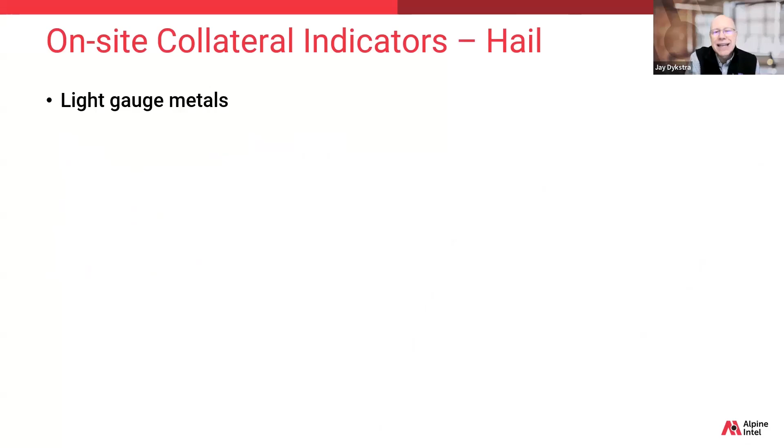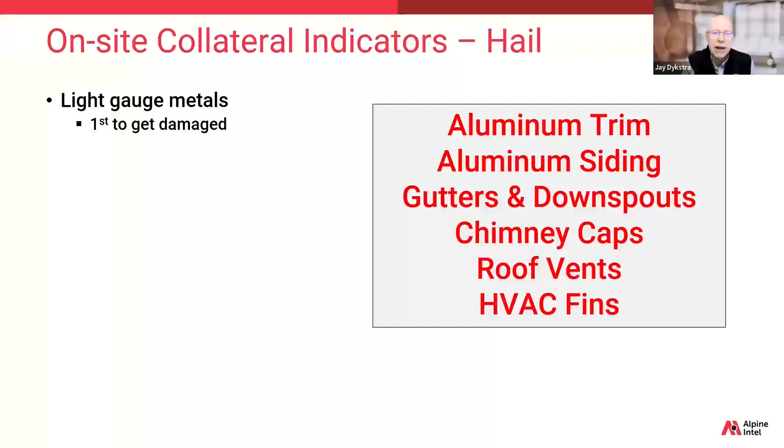So with all hail-related claims, we're going to want to investigate what evidence we have there was actually hailfall at the location of this roof, right? Light gauge metals are a great place to look to see if there was any hail at this property that you're inspecting. Those materials would be first to get damaged, and listed there on the right are just a few of the more common ones, but certainly there are others out there you might find on or around any given commercial property. Here's a couple roof vent caps that are clearly showing hail was present at this location.

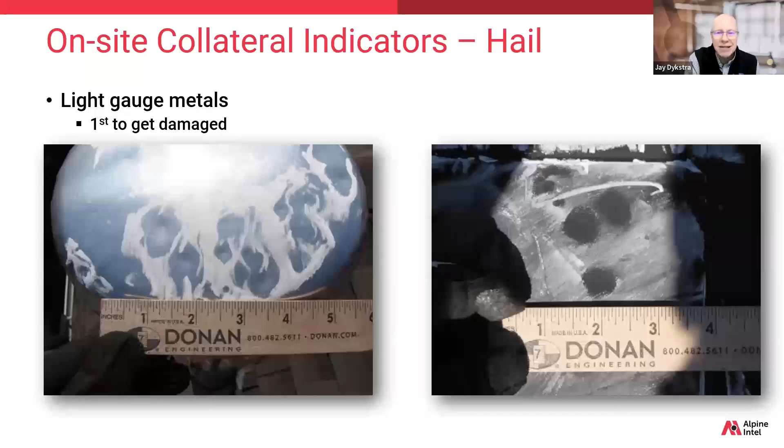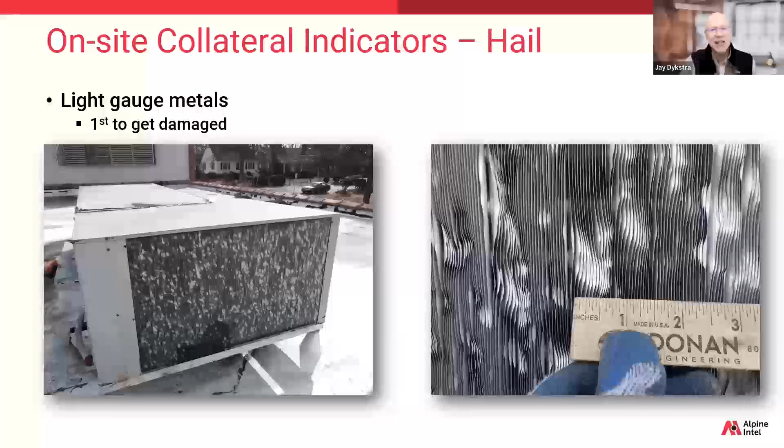Note it's always a good idea to include a ruler in your photo to show scale. Remember, the size of the dent or dents is not the size of the hail in most cases. Here's some more great photos using HVAC condenser fins to tell the story of how much hail, the size of the hail, and the direction of that hail. But be careful, just because you have some or even significant signs of hail to light metals, it still does not guarantee damage to the commercial roof membrane. Don't get ahead of yourself and jump to conclusions.

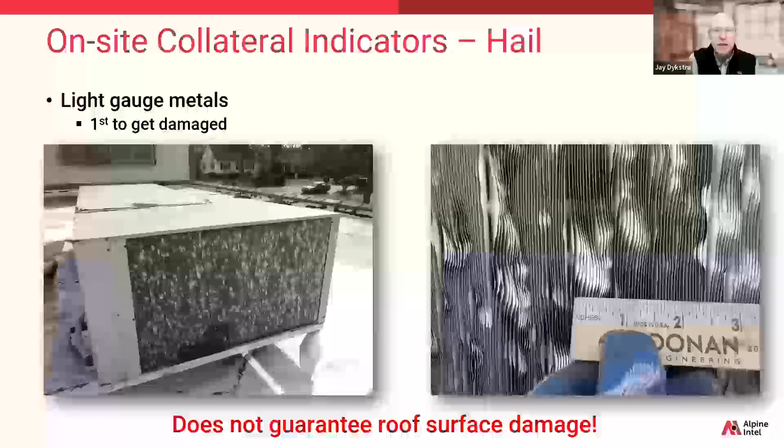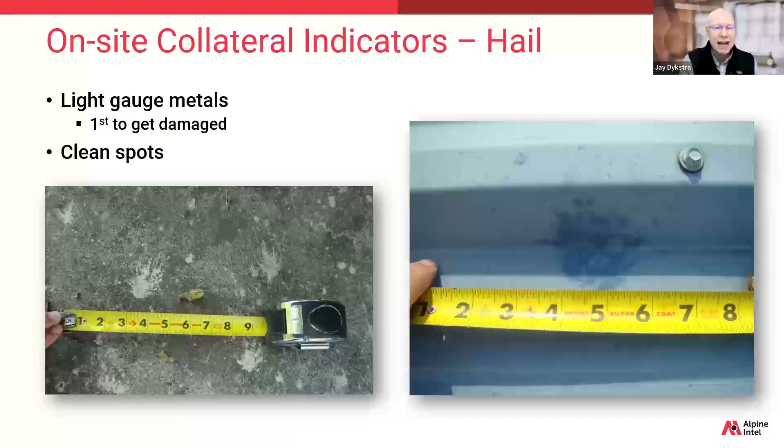All right, then we have the phenomenon called clean spots. Some might call it spatter, splatter, even splash marks. Often it is mistakenly identified as hail, when in fact, as I've said in the past, it's the opposite. In these cases, the hail actually made the product better, cleans off dirt, debris, stains, and oxidized paint. Clean spots such as these examples can help with several things, though, which is great. How much hail fell? We kind of refer to that as density. What size was it? And what direction did it come from? And again, this evidence of clean spots also does not mean we have hail damage to the roof membrane, even with big clean spots.

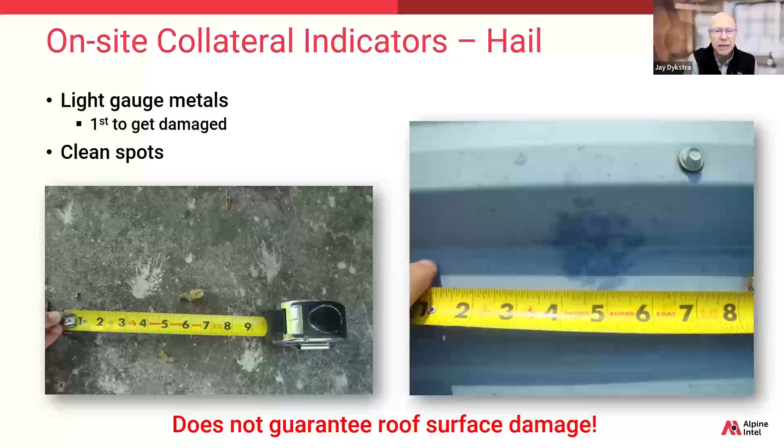So what is hail damage to these types of roofs? Well, we have a kind of an official engineering definition that hail damage to a built-up roof or mod membrane can be defined as an identifiable mark of distress caused by hail that, here's the key, measurably and significantly reduces the integrity and/or functionality of the overall membrane. Of course, that's where it was sound and good before the hail impact. And depending on the composition of the roof, hail damage can take many forms. It's not always just one uniform thing.

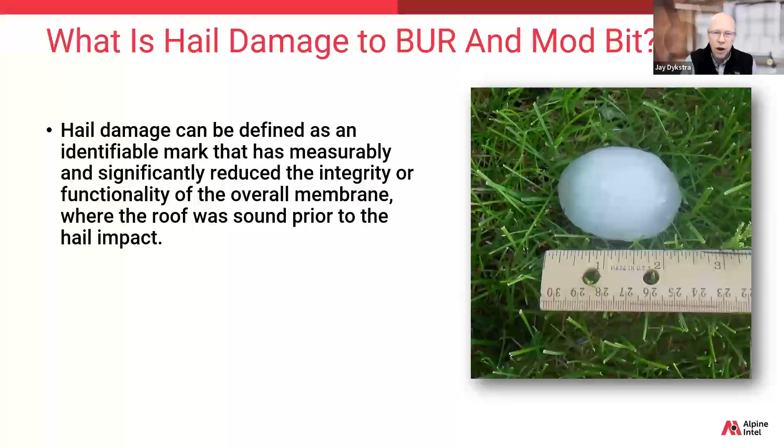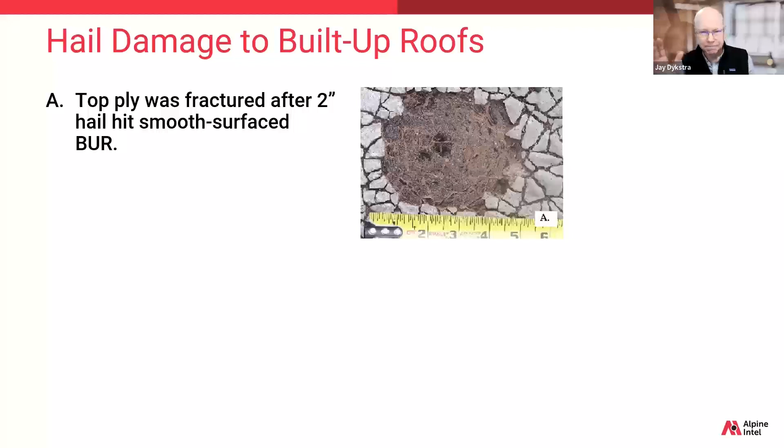So now we're on to everybody's favorite section, besides, of course, the case studies. That's looking at photos of damage. First four are going to be built-up roofs. Here's our first image. You can see an example of a smooth surface built-up roof, even though it's older. It did have that elastomeric coating, right? Notice the flood coat was already cracking, showing extreme age, but it did get hit by 2-inch hail. It shows major damage. Flood coat blasted away, and the top ply of the system was actually fractured.

And I love this comparison in image B, where we also had collaterals telling us we had approximately 2-inch hail, but this time we had a built-up roof that had that gravel surface. Same size hail as A, but with gravel surfacing, which protected it, this roof surface did not sustain any fractures. So I guess that's a good selling point to have gravel added to the roof beyond the fact that we needed it there or wanted it there to protect from UV that we talked about earlier.

Image C, and this time we have a kind of a strange scenario. This is an older coal tar application, but that's not why it's more susceptible to hail in this case. There was a ridge in this roof surface for some reason, not really sure why, but it had less gravel. It was also less supported underneath it, right? We talk about that in our other hail classes. It's going to be more susceptible if it's less supported. And we end up with damage in this.

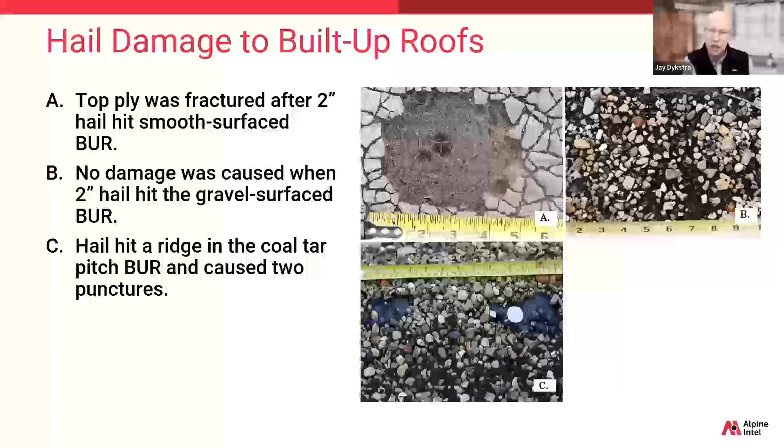Note too, we can tell this is kind of newer damage. The exposed roofing product under the gravel is still nice and black. Even though it's older, it looks newer because it's just exposed. And if this had been there for a long time, it would be more dried out, might be faded and things like that. Then our last image, again, good marketing photo if you were a salesperson selling gravel-coated roofs. This one was hit by confirmed large hail, did displace a little bit of the gravel, but it did not create any functional damage to the top coat or the plies of that roof.

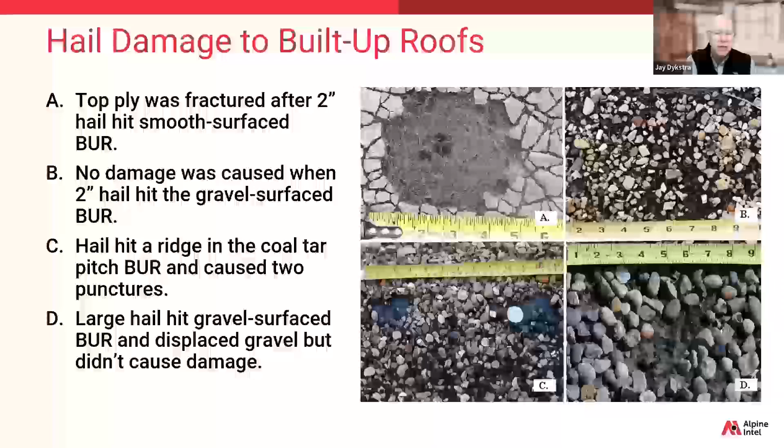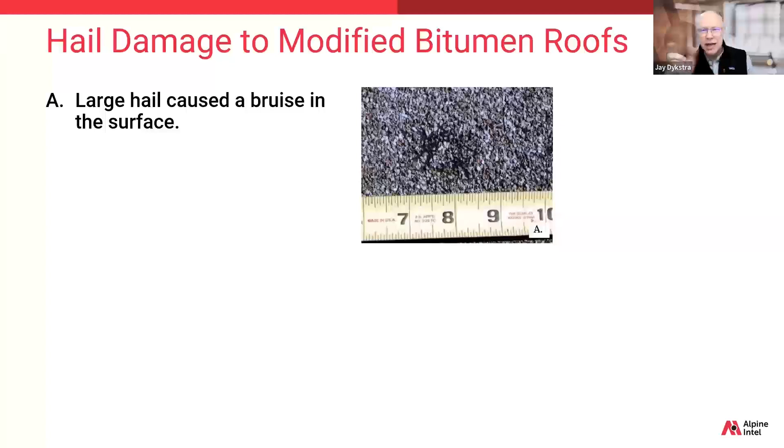All right, now let's talk about hail damage to modified bitumen roof membranes. In our first photo, you can clearly see a large bruise caused by a hail hit. Again, love the fact there's a ruler in that photo. Sometimes when you take a close-up photo, or maybe you get a close-up photo, you have no idea what you're looking at. Is that mark a 1/4 inch across, or is it 1.5 inches across like this one? So try to always get a scale in there, right?

This photo is a cutout of that same bruise we just showed you. And wow, look at that, that was big hail. It definitely created functional damage. As you can see, the fracture all the way through the mod bit membrane and even into the felt paper below it, right? Great photo. We're not really recommending you get out there or have somebody get out there and start cutting open the suspected hail hits. This was for a very specific scenario, but hey, it sure works great and nice to use it as a teaching point and show you what it means when we say have a fracture completely through the membrane, which of course would allow water to get below it, which is not good, creates all sorts of other issues, and might be your next claim.

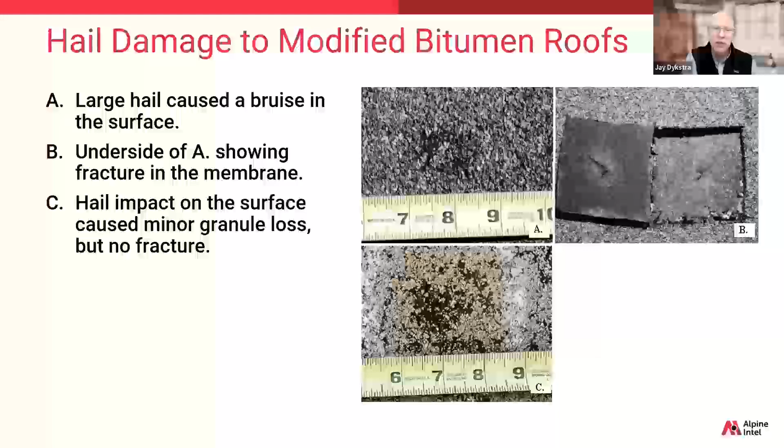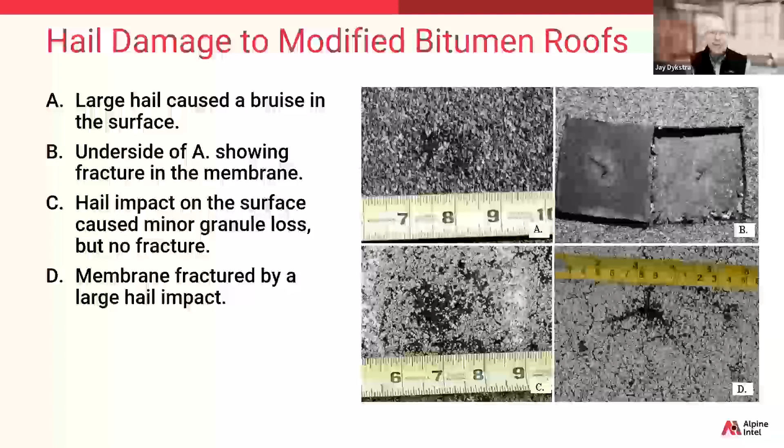Then we have this one, photo C. Perhaps it looks as bad as the one above, but the fact this time is a lot of granule loss, but no fracture. So you do have to be careful with your identification. Know what policy's in force. Perhaps there's something about functional damage versus cosmetic damage. You need an engineer to inspect the roof and let you know, but ultimately you're going to have to make the coverage decision when it comes to that. And with our last photo, we have another clear hit with a significant fracture. And I know if we cut this one open, we would probably see a very similar event as the one right above it.